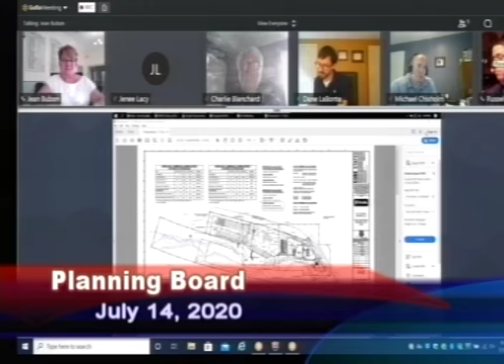Thank you again, everyone, for continuing to work with us on this project. As Jean mentioned, Conservation Commission last week did have a few details they wanted to work out.

Rather than putting a bunch of conditions, everybody was okay with the plan, but they wanted to approve a plan that was finalized without conditions. But they did grant us permission to go ahead and begin demo and build the retaining wall for the new building in the interim time frame.

We plan to start asbestos abatement most likely tomorrow. That's when our 10-day notification period for the asbestos on that building expires. So we'll start abatement, and that'll take about a week and a half. Starting on the 27th, we plan to do full demolition of the abandoned building, which will take roughly 2 weeks.

Then we'll build the retaining wall, assuming I get approval here tonight. After building the retaining wall, we'll backfill behind it, and then we'll be off to the races with the new building.

So things are progressing. As Jean said, we've been going back and forth revising what I believe everybody - John, Alan, Jean - would agree are details on the plans. There's been no substantial changes to the design at all, but we're trying to address the comments of conservation and you guys, as well as John's third-party review.

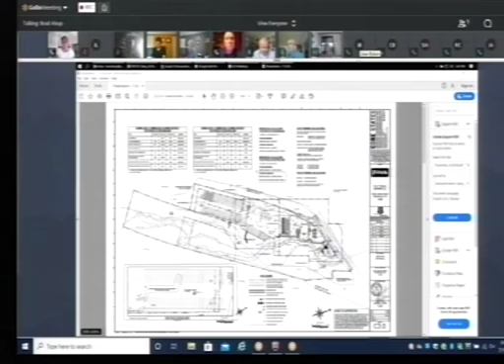On the screen you'll see the overall site plan. I'm just going to go through the big talking points that we've had to make sure we're all on the same page. What I've done on all these sheets is clouded in red the areas where substantial changes happen.

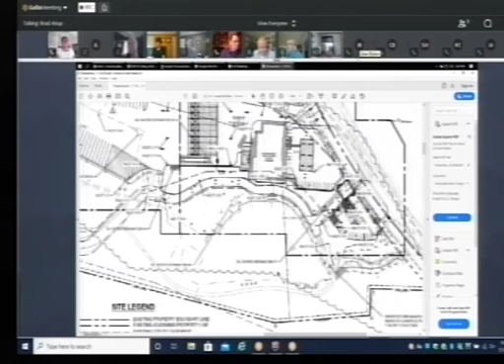The first area, this was a request by Conservation Commission, is that we put a gate here. It's kind of a knockdown gate to keep people from driving over the dam that goes over the stream or the brook and creates the pond. So we've put a note there that we'll install that gate to provide protection for that area.

The biggest change to the entire site - I believe I mentioned this briefly last time we met when we continued - there was a lot of concern about trucks parking in the southernmost parking area, what we refer to as the upper lot, and backing up. As you're probably aware, behind the curb line it drops off to the brook, and trucks were just dumping unwanted parts of their load down the brook, creating a mess and potentially impacting the stream. We don't want to see that happening.

So after a lot of back and forth with conservation, and I believe with you guys as well, what we've decided to do is pull up approximately 12 feet of asphalt and put a new curb line in, then put 15 feet behind that curb line with an 8-foot tall chain link fence. The reason I wanted the 15 feet is a typical design for us would be a 60-foot truck parking space with a 15-foot clear behind the curb line because of the overhang of the rear of the trucks - they always back into the spaces.

That way I can protect the fence from being pushed down or knocked down by the trucks. The other thing is I can't push the fence any further down the slope because it drops so fast - we'd lose the effectiveness of an 8-foot tall fence.

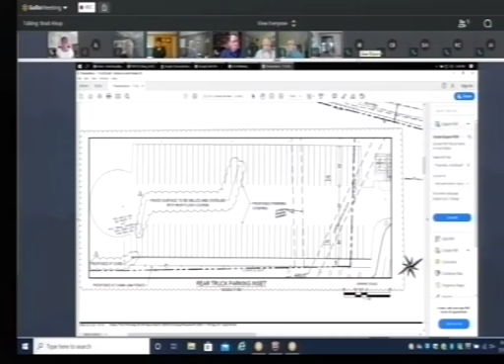So this is actually a standard parking design for one of our sites, 700 plus facilities. It's a great layout, and I think it's going to be a huge environmental improvement. One, because we're going to be able to protect from dumping, and two, we pulled up a strip of impervious surface, 12 feet wide, that will be replaced with grass. So I think it's a win for everyone on that one.

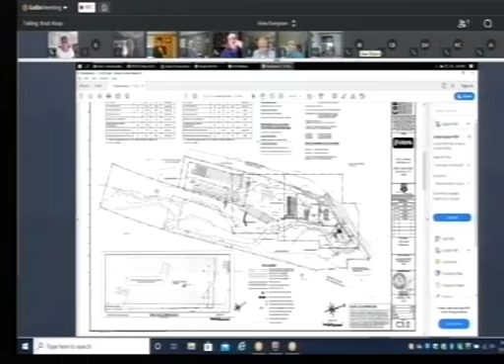The next page I'm going to go to is just a blow up of the front part of the site. One of the areas we discussed a couple times with John was the crosswalks. So we've revised this area between the building and the gas fueling area, and the additional parking, with a series of crosswalks and stop marks to protect pedestrians who may be circulating through the site or who want to go beyond our site and walk down the road. I believe John has indicated in his last review letter that this is satisfactory.

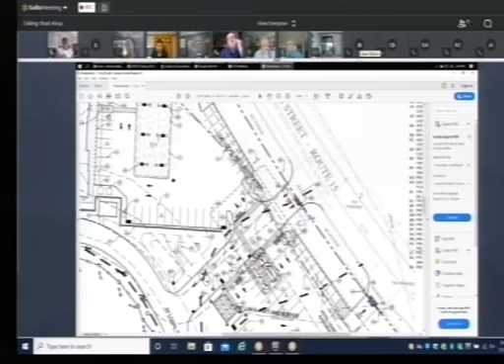The other big area of change you'll see on these plans is modifications to the infiltration basins. There's one immediately adjacent to the Ovide Pond, and another on the other side of our access road from that pond. We've had to recontour those to avoid the 50-foot wetlands buffers. We've also modified the landscaping in those areas to accurately reflect tree removal and protection, and also show any new trees that are going to go in.

The next thing I want to show is the middle portion of the site. So to the far left, you see the beginning of that upper truck parking lot. Over here would be the building. We're continuing the fence along behind this parking area.

Again, that probably won't be 8 feet. I'll drop to 4 foot, which is our standard kind of trash fence. It's just to keep trash from blowing around. It'll be effective in blocking trash very well. But this road that goes back to our water treatment building was requested.

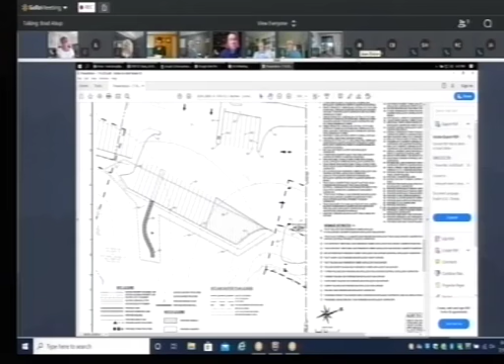What material is it going to be? It's going to be crushed stone, with a geotextile fabric underneath it. That was indicated in our response letter, and I believe, again, that John signed off on that.

And then this is from the landscaping plans. It just shows the area of those two ponds, that there's going to be a lot of grass there. We're still working a little bit with the Conservation Commission about tree disposition and replacement. One of John's comments was, you're doing a lot of fill in some of these areas, will the trees survive? My response was, if working with the landscaper and town staff we're concerned the trees won't survive after we've done the fill in those areas, we'll replace the trees. So either way, there won't be additional loss of trees.

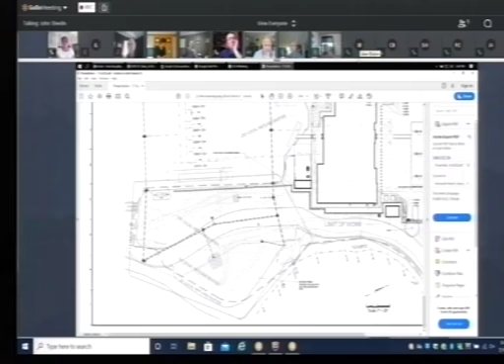Yeah, Brad, I just want to add that I'm not a landscape architect. I just know those are the types of things people have thrown at me in the past, when we try to fill a little bit over a tree. That's the only reason I brought it up. It could survive, I'm just questioning whether the landscape architect could have an opinion on it. Again, we will address that during construction. If it looks like it's not going to survive, no questions asked, we'll come to Gene and say we're proposing to put in a red oak, or whatever is acceptable, and are you okay with that? And we'll go from there.

So that's kind of the big changes we've made. There are a lot of small cleanup type changes that were done after our last full hearing, in addition to several rounds with Conservation and with John. So I think we've gotten our plans to a point that they are satisfactory to John, satisfactory to Gene, and we would ask that you guys go ahead and approve those plans. I've read over the conditions she proposes, and all those conditions are perfectly acceptable. Just to give you a little heads up on timing, I've mentioned where we are on demo.

Health has approved the plan pending me giving them a couple more pieces of information, some more money, so that'll happen in the next couple of days. Mass DOT has approved our driveway permits. Conservation Commission we should finish up with on August 4th. The building department, Nelson, is happy with what he's seen. We're just working through some paperwork issues, not even issues, just working through the paperwork. So we're right there on all of our approvals.

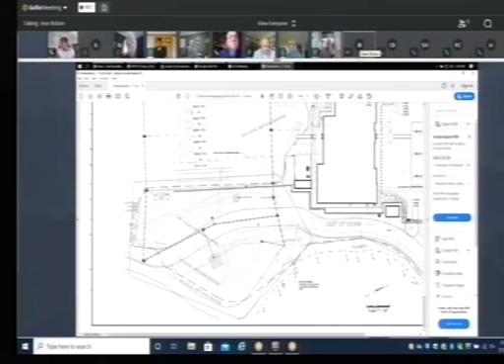Okay, we did get a report, an updated report from John. John Shevlin, would you like to go over and add anything to this?

Sure. Yeah, we've been working very closely with Coors and Alan in particular. We've had, since the last meeting, two different submissions that were reviewed. As Brad mentioned, a lot of the things were relatively minor. Some were things that just came up in the whole review process. I think everything has been working in the right direction, and a lot of the comments we've had have been addressed appropriately.

One of the things that was talked about was Haynes Street and crash data, which came up. I know Brad didn't mention it, but I believe Brad has agreed that they will work with local enforcement as far as putting appropriate signage up there for no parking, and will work with the police as far as monitoring anybody out there.

The crash data, they did have in the traffic report, crash data from Mass DOT. Typically what we found, the crash database is pretty complete, but somebody brought the question of checking with the local police. I believe that has occurred, and they stated there's a combination of on-site crashes and off-site, but for the most part I don't see any safety issues. If anything, it could be rear-enders that may have occurred in the parking lot, but nothing that's going to be a real safety issue. So I think what they've provided in the traffic study is complete.

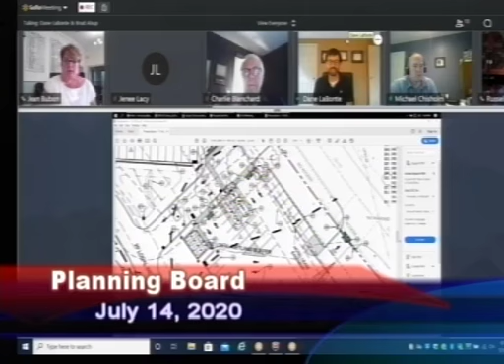Well, I'm a little confused, but let's get it up here. Perfect. Okay, so you see, underneath here it says wetland. Sure, so in the middle, two rows of islands. Yep, you're right over that little triangle I'm talking about. There wants to be another one just to the right. Right here? You're not going to lose any parking spaces. Are you talking about right here?

Exactly. You're going to close that up with a striped triangle just like you did on the other row. But then we need a stop bar for that drive aisle on the upper side of that row, for the three-way traffic aisle intersection with no stop control.

So you're drawing the triangle correctly with the little hand. If that's the board's pleasure, we can do that. And then with a stop bar in that other aisle just above it there? How about stop bar right here? Yeah, exactly. And that way, the people coming to the site have the right of way, and there's no conflict.

They don't have to look over their left shoulder to make sure they don't have an accident there. And just remember, this driveway is exit only, so nobody's coming in this way. That wouldn't be my concern anyway. I'd be concerned that two people would be coming from the center drive aisle towards the exit only, and conflict right there because neither of them has a stop bar. Okay, that's fine, we can do that, Alan.

If you, I guess Gene, can put that as a condition, and Alan, we'll get that thrown on the plan. Perfect. And then up on the northernmost, I guess it'd be the westernmost entrance, the double truck entrance, it's showing a single yellow. Can we make that a double yellow? Sure. That's great. Those are my only comments.

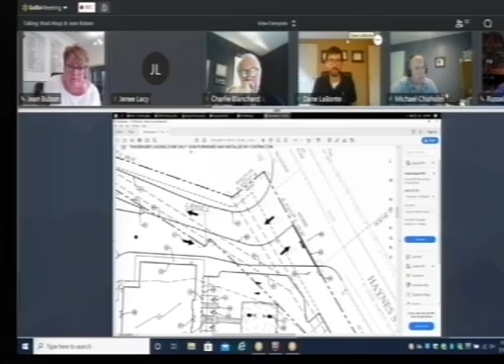Thank you. Brad, could you move your cursor over where he's talking about, because I'm not seeing it. Oh okay, this is to be double yellow. Exactly. Thank you, Brad.

Okay, thank you, Jane. Sue? I have no questions. Now I gotta stop... I'm sorry, Sue, I couldn't hear you. I have no questions. Oh okay, great, thank you.

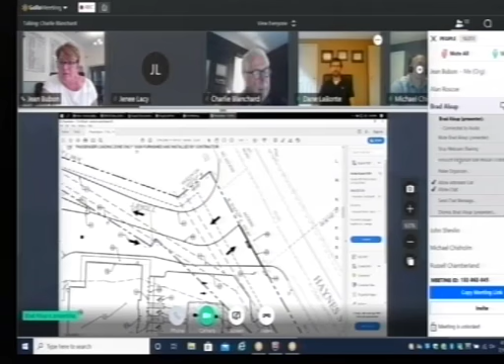Okay, Jane, do we have anyone from the public that's interested in making a comment? We're going to check right now.

Is there anyone on the public line that would like to make comment about Pilot Travel Center public hearing? I just dumped Brad off the meeting, so we'll have to wait a second for him to get back on. I guess he has no comments.

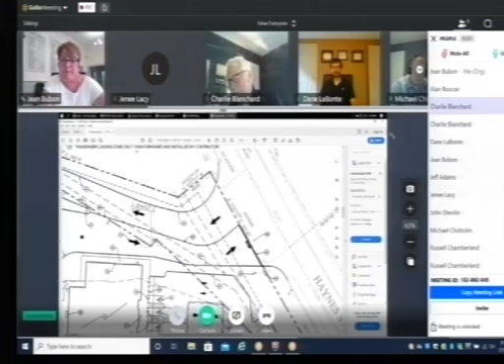Oh gosh, Janae, I clicked the wrong button there on the sharing. I threw him right out of the meeting. It's weird because he's still sharing. How do I... I guess share your own screen, Charlie. This is Sue, then stop. Can you hear me? Yes. Has the tree warden been involved in the planting, in the questions with the landscape architecture? What did I just do? I don't know, everyone looks fine here.

I'm back. When you took the screen away, I'm sorry, it's me, Gene, Brad. That's okay, I just want to make sure I didn't miss anything in those couple of minutes there. No, I knew I dumped you, so I asked everybody to wait. Sorry about that. It's okay.

So Sue had a question about the involvement of the tree warden in the landscape plan. Our new tree warden is not reviewing our landscape plans. He'll be reviewing the tree plantings as they go in, but not our landscaping plans. We've been reviewing those in our department and looking up the plant materials and making sure things are adequate for this area. But he will be giving guidance when we do the tree plantings and also if any of the trees die, so trees are kind of his expertise, more than perennials and things like that.

Okay, great. Yeah, it's okay, but I'm just wondering - I'm on my cell phone microphone, okay? Just so you understand the problem here: if he is going to make sure the proper trees are planted, how are we any experts in what plants are planted?